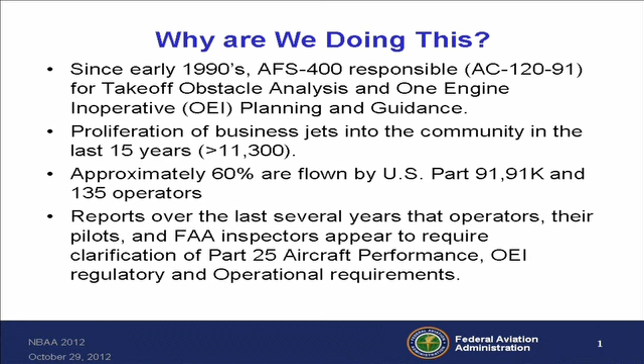And I know there's lots of stories, I've heard them all. So as far as the TAP goes, it cranked up about 2 years ago. We came up with a charter, and it was to improve the operator and inspector knowledge of CFR Part 25 aircraft performance.

Now, there's a difference between TERPs and aircraft performance, and I think everybody basically understands that. TERPs is something that the basic pilot just doesn't have to care about because he has an instrument approach plate or procedure, departure, star, or something like that, that is already done for him. All he has to do is be trained and understand how to fly that procedure, and he's A-OK. There's another side to the whole jet flying business, and that's the understanding of aircraft certification requirements.

Particularly when it comes to things like one engine inoperative takeoff planning. That's something that everybody has to be responsible for, and there has been very little work done, particularly by the FAA and the industry, in making sure that that knowledge has been put forth.

So we put together this group, members of FAA Flight Standards, Aircraft Certification Office, that's an FAA certification function. SAPOE is a Society of Aircraft Performance and Operations Engineers. NBAA, ALPA, and other industry subject matter experts to sit down and identify what we needed to do.

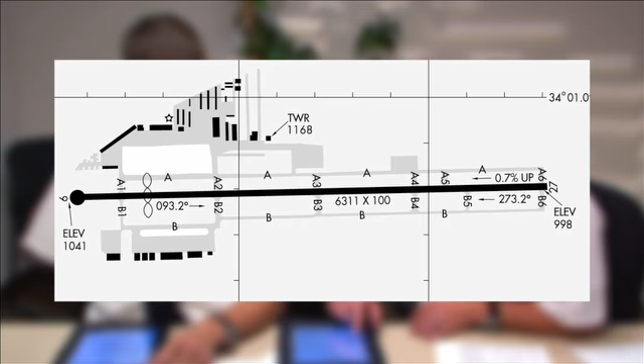Here we see a flight crew briefing the runway available for takeoff at the McCollum-Cobb County Airport near Atlanta. The runway at McCollum is 6,311 feet in length. However, the crew refers to the FAA Airport Facility Directory to see if declared distances have been published for this runway. Looking at the declared distances for runway 27, the crew notices that the takeoff run and the takeoff distance available are both 6,311 feet. However, the accelerate stop distance available is only 5,374 feet, a difference of over 937 feet. The pilot appropriately alerts his first officer to this fact to ensure no computation errors are made.

Awareness of declared distances is key to ensuring accurate arrival and departure calculations. Declared distances refer to the length of runway declared usable for takeoff and landing for the purpose of airplane performance calculations.

The accelerate stop distance available is the runway plus stopway length declared available and suitable for the acceleration and deceleration of an airplane aborting a takeoff. The accelerate stop distance available may be longer than the physical length of the runway when a stopway has been designated available by the airport operator, or it may be shorter than the physical length of the runway if the runway lacks an adequate runway safety area or in some other way does not meet runway design standards.

Takeoff run available is the runway length declared available and suitable for the ground run of an airplane taking off. Takeoff run available is typically the physical length of the runway, but it may be shorter than the runway length if necessary to satisfy runway design standards. For example, the takeoff run available may be shorter than the runway length if a portion of the runway must be used to satisfy runway protection zone requirements.

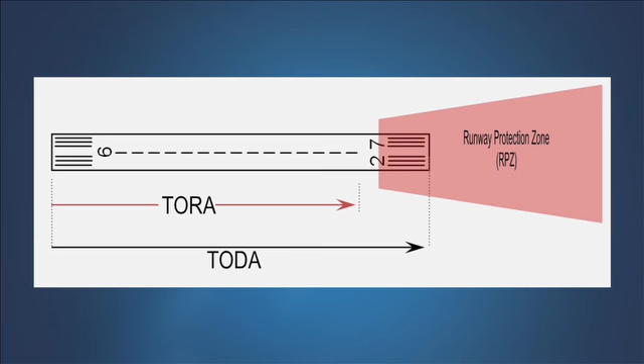Takeoff distance available is the takeoff run available plus the length of any remaining runway or clearway beyond the far end of the takeoff run available. The takeoff distance available is the distance declared available for satisfying takeoff distance requirements for airplanes where the certification and operating rules and available performance data allow for the consideration of a clearway in takeoff performance computations.

Landing distance available is the runway length declared available and suitable for a landing airplane. The landing distance available may be less than the physical length of the runway, or the length of the runway remaining beyond a displaced threshold, if necessary to satisfy runway design standards. In most cases, a runway's declared distances equal the physical length of the runway, or in the case of the landing distance available, the length of runway remaining beyond the displaced threshold. However, this is not always true with every runway.

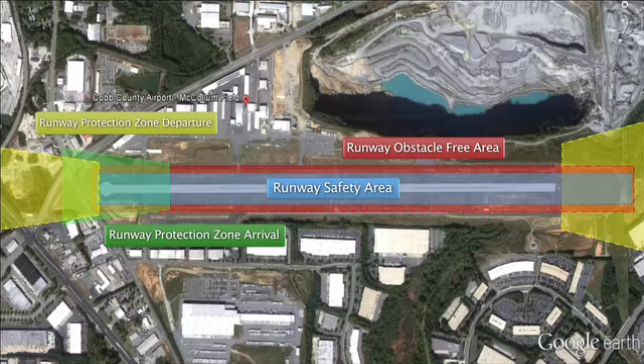Runway design standards ensure adequate protection from obstacles, other airplanes, vehicle traffic, and undesirable activities surrounding the runway and in the immediate vicinity of the takeoff and landing path. In most cases, the environment surrounding the runway permits the full use of the runway for performance planning purposes. However, there are some runways that are geographically constrained, and a portion of the runway's usable length must be used to meet these design standards.

For example, a runway safety area may extend into the usable portion of the runway, limiting the length of the runway that may be used for performance planning related to stopping the airplane, such as accelerate stop distance available and landing distance available. Let's look at how declared distances are used with takeoff and landing runway requirements for turbine-powered transport category airplanes.

The accelerate stop distance is the distance required to accelerate to a point in the takeoff, then in response to an event take the first action to reject the takeoff at a speed no greater than V1, and to bring the airplane safely to a stop.

Originally, the accelerate stop distance did not include consideration for events other than engine failure that could lead to a rejected takeoff. In 1978, the certification rules were amended to consider both engine failure and non-engine failure scenarios. Accelerate stop distance is now the longer of the distance with one engine failing just prior to V1, or with all engines operating throughout the rejected takeoff.

In response to the disproportionate number of rejected takeoff accidents on wet runways, the certification rules were again amended in 1998. Manufacturers are now required to provide wet runway accelerate stop distance and wet runway takeoff distance data in the airplane flight manual for all newly type certificated transport airplanes, and the operating limitations for these airplanes require the use of this data when the runway is wet.

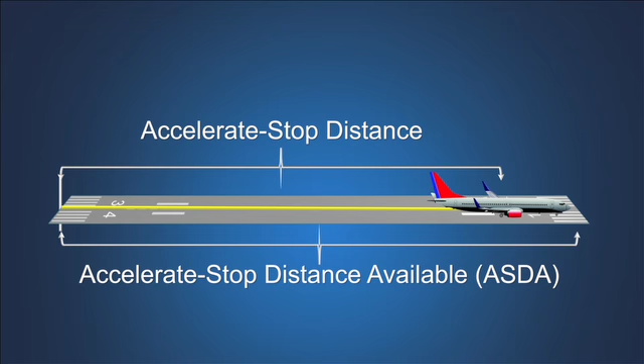The takeoff distance is the distance from the start of the takeoff roll to the point at which the airplane attains a specified height above the takeoff surface. For a takeoff on a dry runway, the takeoff distance is the longer of the one engine inoperative takeoff distance to 35 feet above the takeoff surface, or 115% of the all engines operating takeoff distance to 35 feet above the takeoff surface.

For airplane types certificated after 1998, when taking off from a wet runway, the takeoff distance will be the longer of the one engine inoperative takeoff distance to a height of 35 feet above the takeoff surface, if the runway is dry, or the one engine inoperative takeoff distance to a height of 15 feet above the takeoff surface, if the runway is wet.

On a wet runway, the all engines operating takeoff distance is 115% of the distance to a height of 35 feet above the takeoff surface. The longer of the one engine inoperative takeoff distances for either a dry or wet runway, or 115% of the all engines operating takeoff distance to 35 feet, establishes the minimum takeoff distance when a runway is wet. The calculated takeoff distance cannot be longer than the takeoff distance available.

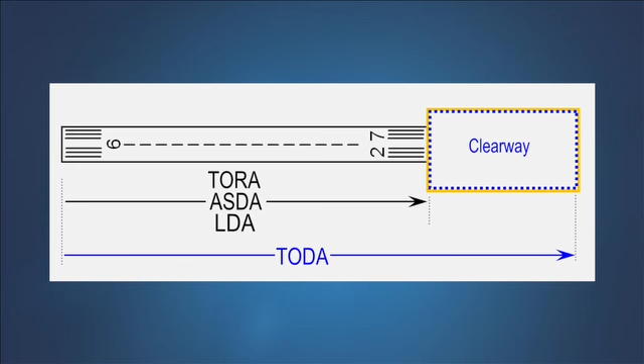The takeoff run distance is a consideration when the takeoff run available is less than the takeoff distance available. For example, when the runway has a designated clearway usable for takeoff planning, the takeoff distance available will be longer than the takeoff run available.

The takeoff run is the longer of the distance required from the start of the takeoff to the midpoint between liftoff and the point at which the airplane attains a height of 35 feet above the takeoff surface, with one engine inoperative, or 115% of the distance required from the start of the takeoff to the midpoint between liftoff and the point at which the airplane attains a height of 35 feet above the takeoff surface, with all engines operating, whichever is longer. The takeoff run applies only on a dry runway. The calculated takeoff run cannot be longer than the takeoff run available.

When taking off from a runway where the takeoff run available is equal to the takeoff distance available, the airplane's takeoff run may be considered to be equal to the airplane's takeoff distance. The landing distance demonstrated during certification is the distance required to come to a full stop from a point where the airplane is 50 feet above the runway.

Air carrier, on-demand, and fractional operators must plan their flight such that their landing weight at the destination airport and the alternate airport, if one is required, will permit the landing distance demonstrated during certification to remain within 60% of the landing distance available. These operating rules impose a limitation on takeoff weight in consideration of the fuel used in flight.

For eligible on-demand and fractional operators that meet certain qualifications, including the use of an approved destination airport analysis, this requirement is adjusted such that the landing distance demonstrated during certification must remain within 80% of the landing distance available.

FAA guidance recommends that as close as practical to the time of arrival, flight crews perform an assessment of the actual landing distance required based on the reported weather and runway conditions and include an additional 15% safety margin. The minimum runway required resulting from this assessment must be less than the landing distance available.

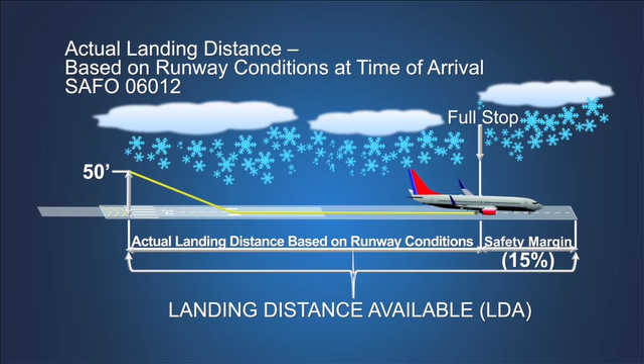The airplane operating rules and operating limitations establish minimum distance requirements as well as weight limitations for takeoff and landing, based on performance data supplied in the airplane flight manual. The minimum distances required for takeoff and landing, obtained either in planning prior to takeoff or in performance assessments conducted at the time of landing, must fall within the applicable declared distances before the pilot can accept that runway for takeoff or landing.

Declared distances are published in the FAA Airport Facility Directory for runways where they have been established. In the not-too-distant future, all Part 139 certificated airports, which are those with scheduled air carrier operations, will have declared distances published. In some instances, an airport may shorten declared distances for a runway when necessary to meet runway design standards. This is the case with Cobb County McCollum Airport near Atlanta, Georgia.

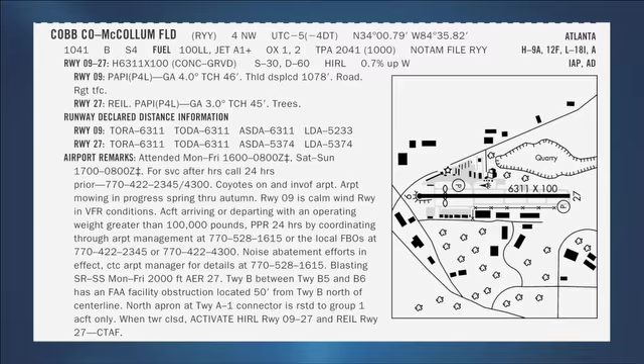However, there are many runways that do not have declared distances published. For runways without published declared distances, these distances may be assumed to be equal to the physical length of the runway. If the runway has a displaced threshold, then the landing distance available is assumed to be the runway length less the amount of the threshold displacement.

Pilots who use U.S. government instrument approach charts and airport diagrams may recognize the inverse D graphic symbol. This symbol is also used to inform operators that there are declared distances established for one or more runways for this airport. The pilot should consult the FAA Airport Facility Directory to obtain these distances.

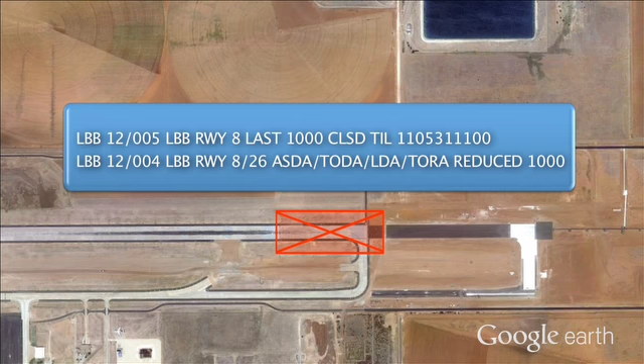Temporary partial runway closures, such as this example from Lubbock, Texas, may include a notice to airmen reporting revised distances. Pilots must be aware that the runway lengths stored in the navigation database of the GPS or flight management system may not reflect the runway's declared distance.

The runway length at McCollum-Cobb County is 6,311 feet, which is the same value stored in the navigation database.

Flight management systems for many business aircraft incorporate performance calculation functions. These functions can compute the takeoff and landing distances required for conditions and have the capability of calculating the maximum allowable takeoff or landing weight for a particular runway. However, these calculations are based on the runway information stored in the database. The runway length stored in the navigation database may not reflect a runway's declared distances, or the length of a runway remaining beyond a displaced threshold available for landing.

For those flight management systems that do provide takeoff and landing performance calculations, the results of these calculations may not reflect the true maximum allowable takeoff and landing weight for that runway based on conditions.

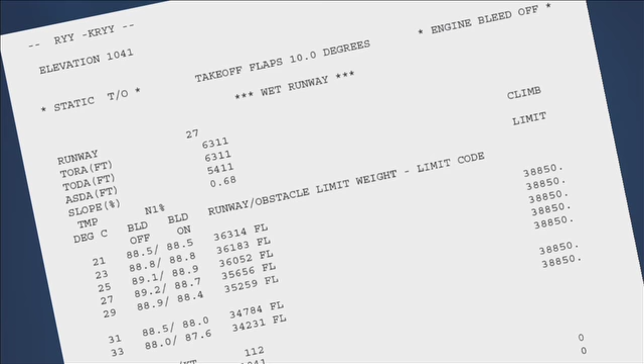For example, the flight management system for this airplane calculates a maximum allowable takeoff weight of 38,247 pounds for takeoff on runway 27 if the runway is wet. However, the runway analysis for runway 27 reports a maximum allowable takeoff weight of 35,656 pounds, a difference of over 2,500 pounds.

If the crew relies on the flight management system to compute their required takeoff field length, which in this example is 6,273 feet, they may not be warned that this value has exceeded one of the runway's declared distances. The 6,273-foot takeoff field length required exceeds the runway's accelerate stop distance available of 5,374 feet. The flight management system will provide no warning message of this exceedance.

As you can see from this view, Cobb County McCollum Airport's runway 27 has a physical length of 6,311 feet. However, both the declared accelerate stop distance and the landing distance available are 5,374 feet, which is 937 feet shorter than the physical runway length. There is no displaced threshold on runway 27, so some pilots may wonder why these distances are reduced. The last 937 feet of runway 27 is used to satisfy the requirement for a 1,000-foot runway safety area.

The application of declared distances is intended to ensure that, with respect to airplane performance capabilities only, the airplane has the capability of stopping during the landing maneuver or in the event of a rejected takeoff before intruding into the runway safety area. For this reason, the declared accelerate stop distance available and the landing distance available is less than the physical length of the runway.

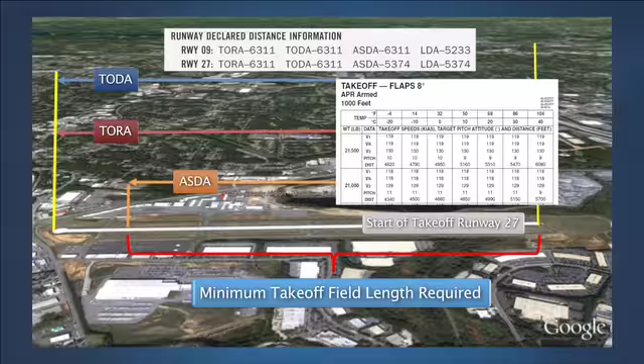The takeoff data furnished for most business jets provides a minimum takeoff field length required based on takeoff weight, takeoff configuration, and environmental conditions. When the manufacturer provides takeoff performance data that shows only one minimum runway length, this length must not exceed the most restrictive of the takeoff declared distances of accelerate stop distance available, takeoff run available, or takeoff distance available.

The minimum field length required for takeoff is usually based on the balanced field concept, which is a condition where the selected takeoff V1 speed results in accelerate stop distance being equal to the one engine inoperative takeoff distance.

A small number of business jets are furnished with unbalanced field takeoff data that allows for the independent calculation of takeoff distance, takeoff run, and accelerate stop distance. These airplanes can realize a takeoff weight advantage over an airplane that is limited to balanced field takeoff data by calculating an unbalanced V1 that may be higher or lower than the balanced value, depending on the declared distances available.

If the runway remaining beyond the end of the accelerate stop distance available is included in the takeoff run available and the takeoff distance available, then by using the unbalanced V1, this remaining runway may be used for calculating the takeoff run and takeoff distances to permit an increase in maximum allowable takeoff weight. However, the use of unbalanced takeoff data is an involved process. Use of an airplane performance planning software tool or an airport engineering service that furnishes a runway analysis is recommended.

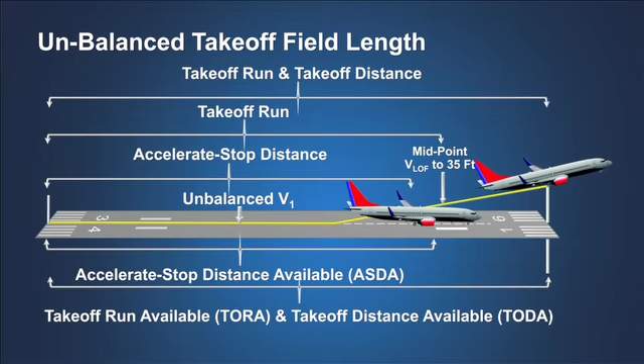A number of business airplane operators use airport diagrams and instrument approach procedure charts furnished by a commercial provider, for example Jeppesen. On their charts, Jeppesen publishes usable runway lengths, not declared distances. The usable length concept was created many years prior to the formal creation of the declared distance concept and continues to be published on their charts in lieu of declared distances.

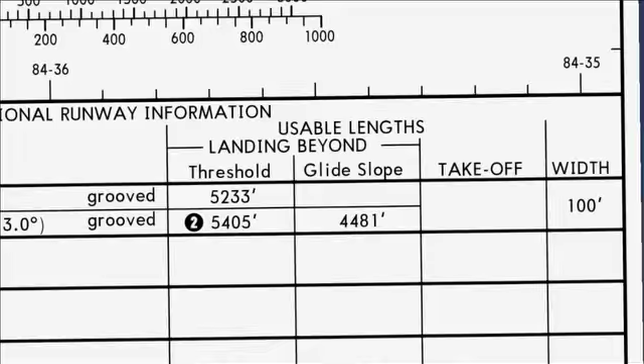Usable length takeoff is almost identical to takeoff run available, and usable length landing beyond threshold is similar to landing distance available, but they are not takeoff run available and landing distance available, and Jeppesen does not incorporate anything similar to accelerate stop distance available and takeoff distance available on these charts.

When a takeoff value and/or landing value is available from source information that is shorter than the runway, Jeppesen wants to display the more conservative values. Jeppesen also publishes notes or otherwise explains length deficiencies or unique usable lengths.

When the landing length is shorter than the full runway length, and this is not due to a displacement, an additional explanatory ball note is applied, reading similar to: last 900 feet is unavailable for landing distance computations. A displacement is accounted for on the charts, not in a length value, but rather in a displaced threshold symbol designation on the charted runway.

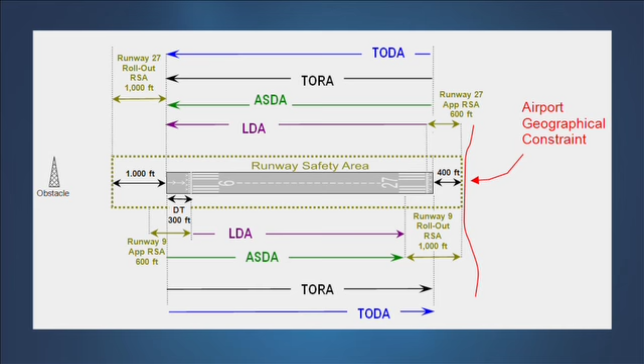Jeppesen's charts are meant to be used for flight and navigation in the first place and flight planning in the second place. Jeppesen additionally offers other products and services specifically for flight planning. The full runway length will always be applied on the plan view to serve pilots' overall needs, as well as unplanned emergency decision-making. It is important to understand that the application of declared distances has no bearing on the operational use of the runway for taxi, takeoff, and landing rollout operations, provided the runway surface is appropriately marked as usable runway.

Now you're going to see some more terms that are going to come up, TORA, RSA, and everything. The bottom line is, in this declared distance business, there are 4 things you need to know: takeoff run available, TORA; TODA, takeoff distance available, which includes the length of the clearway provided; accelerate stop distance available, ASDA; and landing distance available. Those are the 4 key things to declared distances. But what does it all really mean?

By 2015, all the Part 139 airports have to have these declared distances defined. So what it means is, if you think you have a 6,311-foot runway and they cannot provide a 1,000-foot safety area off the end of that runway, they're going to eat the runway to get that 1,000 foot. It may be this much, maybe 600 feet. So you actually lose, for your accelerate stop distance available, that effective runway length that you thought you had. It's going to be in your nav computer or your flight data computer as 6311, when actually it may be 5,300. I think that's an important point to get across.

But the main thing is, as far as declared distances go, they are applying to resolving this runway safety area. It's 500 feet from here to here, and 1,000 feet on either end. And if you can't provide that safety area, you have to eat the runway up accordingly with these terms.

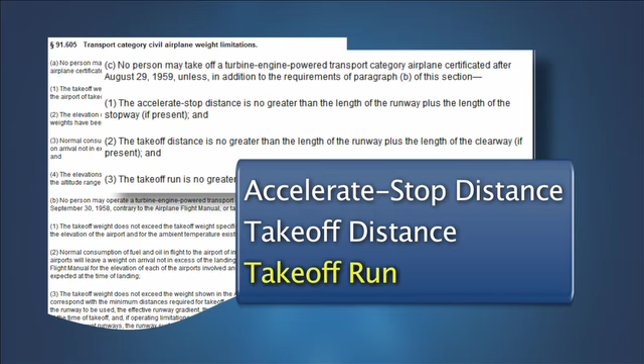A requirement of transport airplane performance planning is determining that the takeoff can be safely conducted on the length of runway declared usable for takeoff. The certification rules prescribe 3 distances that must be considered: accelerate stop distance, takeoff distance, and takeoff run. Of particular importance is accelerate stop distance - the distance required to accelerate to a point in the takeoff, then in response to an event, take the first action to reject the takeoff at a speed no greater than V1 and bring the airplane safely to a stop.

Originally, the accelerate stop distance did not include consideration for events other than engine failure that could lead to a rejected takeoff. In 1978, the certification rules were amended to consider both engine failure and non-engine failure scenarios. Accelerate stop distance was revised to be the longer of the distance with one engine failing just prior to V1 or with all engines operating throughout the rejected takeoff. However, accelerate stop distance was still determined only for a dry runway. In response to the disproportionate number of rejected takeoff accidents on wet runways, the certification rules were again amended in 1998.

Manufacturers are now required to provide wet runway accelerate stop distance and wet runway takeoff distance data in the airplane flight manual for all newly type certificated transport airplanes, and the operating limitations and rules require the use of this data when the runway is wet.

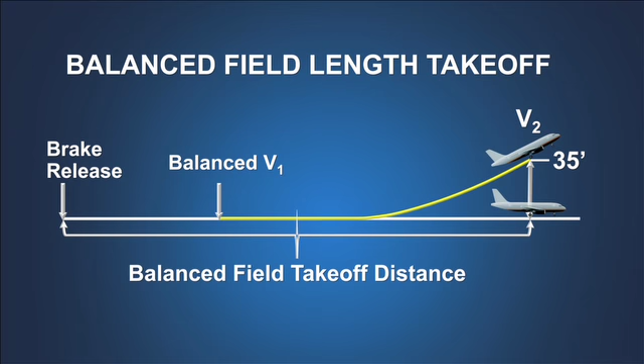Typically, the minimum field length required for takeoff in a 2-engine turbojet transport category airplane is based on the balanced field length concept, where the accelerate stop distance is equal to the 1-engine inoperative takeoff distance. The balanced field length can be obtained when, for a given takeoff weight, a V1 speed is selected such that these 2 distances are equal.

When the runway is wet, the accelerate stop distance increases due to reduced friction during braking. The braking friction on a wet runway varies greatly with speed, while it is essentially constant with speed on a dry runway. At faster speeds, the wet runway braking friction is much lower than at slower speeds. The reduction in braking friction is partially offset by the stopping performance credit permitted for the use of thrust reversers on a wet runway if they are installed and operative.

On a dry runway, the 1-engine inoperative takeoff distance ends when the airplane reaches a height of 35 feet above the runway. To rebalance the probability of rejecting a takeoff on a wet runway versus continuing it, and to reduce the speed at which braking would be attempted, the regulations allow us to consider that the wet 1-engine inoperative takeoff distance is complete when the airplane reaches 15 feet rather than 35 feet required for a dry runway.

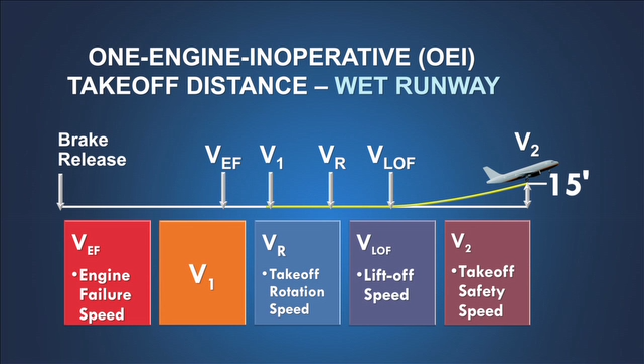Reducing this screen height also reduces the one-engine-inoperative takeoff distance on a wet runway. The allowance for reverse thrust credit and the use of a 15-foot screen height help engineers rebalance the takeoff field length required for takeoff on a wet runway through the use of a lower wet runway V1 speed.

The ability to reduce V1 speed can be limited by VMCG speed and the lowest permissible V1 speed in relation to this ground minimum control speed. When V1 speed is limited by VMCG speed, the takeoff on a wet runway will be accelerate-stop limited.

Note that the all-engines-operating takeoff distance for a wet runway remains unchanged from that for a dry runway. The all-engines-operating takeoff distance screen height for a wet runway remains at 35 feet and still must include the 15% margin.

In most cases, the maximum allowable takeoff weight on a wet runway will remain less than the allowable weight on a dry runway, even though the wet runway case includes credit for available reverse thrust and reduced screen height.

However, there are exceptions. Rocky Mountain Metropolitan Airport, better known as Jeffco, presents an interesting wet runway example for some turbojet airplane types. Runway 11 left, 29 right is the primary runway used by jet airplanes.

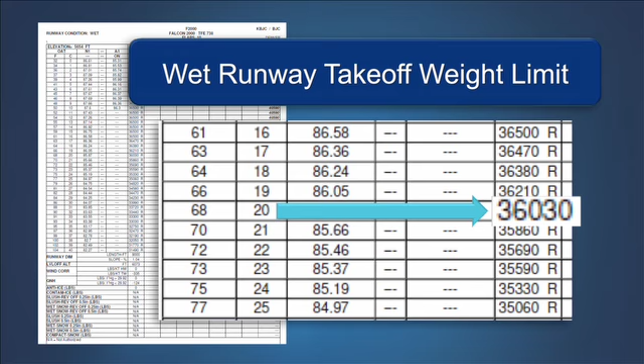Runway 29 right is 9,000 feet in length, with an upslope of 1.2%. A check of a takeoff analysis for one particular business jet type finds that the takeoff weight limit on a wet runway at 20 degrees Celsius appears to be 36,030 pounds. On a dry runway for this same airplane type, the maximum takeoff weight is 33,840 pounds, or almost 2,200 pounds lighter than the apparent weight limit previously calculated on a wet runway.

At 33,840 pounds, the balanced field takeoff distance is precisely 9,000 feet, the length of runway 29 right. However, at this same weight, the balanced field takeoff distance on a wet runway is only 8,000 feet.

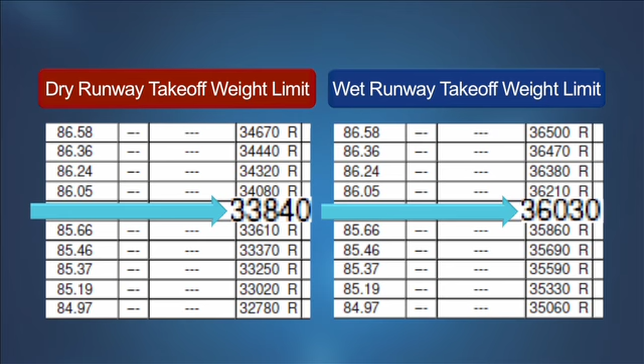The reduced screen height and credit for use of thrust reversers determining the wet runway takeoff performance can in some cases actually produce a situation where, at a given takeoff weight, the wet takeoff performance appears better than the dry runway performance. This can lead to a situation where the wet runway analysis produces greater takeoff weights than the dry analysis, but the certification rules have an additional requirement to address this situation.

These rules specify that the accelerate-stop distance and the one-engine-inoperative takeoff distance must be the greater of either the dry runway or wet runway distances.

This requirement is reflected in the instructions furnished in most FAA-approved airplane flight manuals, where wet runway takeoff performance data is furnished. Users are advised to check the distances required or takeoff weight limits determined on a wet runway against those for a dry runway condition and to use the most restrictive distance or weight limit.

In some instances, the airport analysis furnished will incorporate this dry check. However, users should verify this feature with their performance engineering services provider for their aircraft.

While the scope of this discussion is focused on takeoff performance planning, pilots of transport category airplanes should also be familiar with the takeoff safety training aid. The goal of this aid is to reduce the frequency of rejected takeoff accidents through improved pilot knowledge and awareness of the factors affecting the successful outcome of the go, no-go decision.

The takeoff safety training aid may be viewed at the FAA's Airline Operator Training website.

In summary, when performing departure planning from a wet runway, pilots should have a general idea what the effects of this wet surface will have on accelerate-stop distance and takeoff distance.

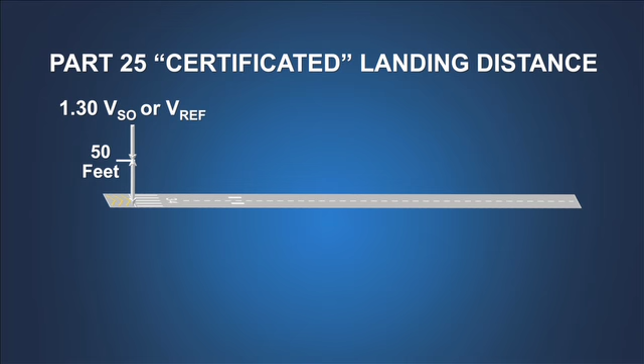The landing distance for a transport category airplane is defined by the certification rules in Part 25. This certificated landing distance starts at the point where the airplane main wheels are 50 feet above the runway surface. It continues through a nominal air distance and includes time delays, allowing for the transition into the stopping configuration. The landing distance ends at the point where the airplane comes to a complete stop.

The use of deceleration devices, such as normal wheel brakes with anti-skid action, spoilers, and lift dumping systems, may be used in determining the landing distance. However, the use of thrust reversers is not considered when calculating the certificated landing distance. Landing distances based on these certification rules reflect the maximum capability of the airplane and are generally shorter than the landing distances achieved in normal operations.

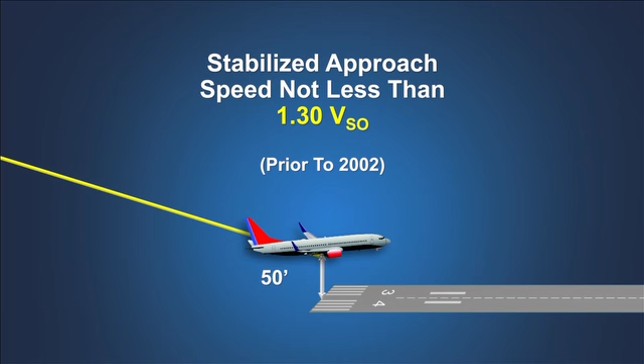Prior to 2002, the certificated landing distance was based on a stabilized approach at an approach speed not less than 30% above the stalling speed in the landing configuration, or 1.3 VSO. A speed greater than 1.3 VSO could be used if needed for acceptable airplane handling characteristics. Over the years, this final approach speed became known by the term VREF, or Landing Reference Speed. However, this particular V speed was never part of the certification rules.

Beginning in 2002, the term VREF was officially incorporated into the Code of Federal Regulations as a defined V speed. Since this change occurred at the same time the rules governing stall speed calculation were amended, VREF differs slightly from its previous use. VREF as now defined may not be less than the reference stall speed, or VSR, which is the speed at which the stall speed in 1G flight corresponds to the point of maximum lift coefficient just before the lift starts decreasing as angle of attack is further increased. VREF must also be above the landing minimum control speed and any speed necessary to demonstrate acceptable airplane handling characteristics.

With the adding of VREF to the regulations, the rule defining approach categories was also amended. For airplanes where VREF is defined by the certification rules, the approach category for that airplane is based on its VREF speed determined at its maximum certificated landing weight.

Stop here just for a second because I want to emphasize something. FAA just recently released a Safety Alert for Operators on this whole topic. And the issue is this: if your airplane is a Category C airplane, you have to fly the Category C approach minimums. You can't fly between 91 and 121 knots because you're lighter, fly slower, and fly Category B minimums. Because the rule requires that you fly at 1.3 VSO at a maximum certificated landing weight, or VREF at maximum certificated landing weight.

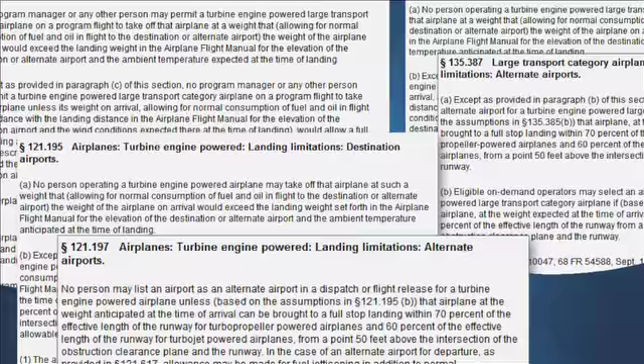It's pretty critical: the landing distances determined during certification are established with full awareness that operating rules require additional factors to be added when determining the minimum operational field lengths for landing during normal line operations. The operating rules for Part 121, Part 135, and Part 91K require that the landing distance demonstrated during certification remain within a specified percentage of the runway length available for landing at both the destination and alternate airport. As a result, these rules establish a minimum operational field length for landing. This requirement does not apply to Part 91 operators, but voluntary adherence to these rules is encouraged.

These operating rules impose a limitation on takeoff weight, such that you do not plan to arrive at your destination or alternate airport at a weight that will not allow you to meet the landing distance requirement specified in the operating rules. Therefore, any planning intended to demonstrate compliance with these rules must occur prior to takeoff, or as a condition of dispatch for those operators subject to dispatch requirements.

When required by the operating rules, the landing distance demonstrated during certification must permit the airplane to come to a full stop within 60% of the landing distance available. Another way of saying this is that the landing distance demonstrated for certification must be multiplied by a factor of 1.667, or divided by 60%, to define the factored landing distance on a dry runway. The resulting factored landing distance is intended to account for operational variables, including piloting techniques, flight path deviations, tire and brake wear, atmospheric conditions including gusts, and other variables not addressed during landing distance certification.

For eligible Part 135 and Part 91K operators, the landing distance demonstrated during certification must permit the airplane to come to a full stop within 80% of the landing distance available. In this case, the demonstrated landing distance for certification is multiplied by 1.25, or divided by 80%, to obtain the factored landing distance on a dry runway for these operators.

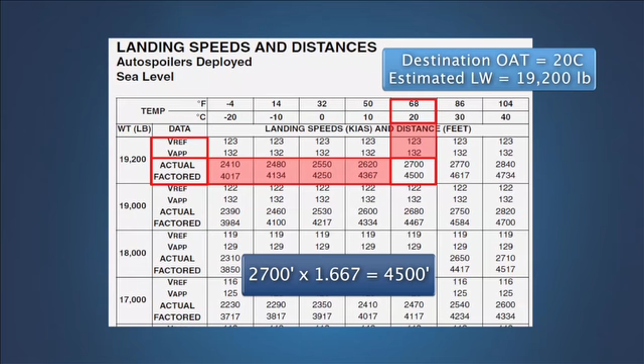Landing distance data published in the Airplane Flight Manual varies widely between manufacturers. Some furnish the landing distances determined during certification, in which case pilots are expected to apply the appropriate multiplier, 1.667 or 1.25, while others furnish the factored landing distance data for use in complying with the operating rules. Some manufacturers provide both the certified and factored landing distances, as in this example. A few manufacturers do not provide landing distance data at all, but rather provide data on the maximum allowable landing weight as a function of landing distance available.

Let's use the data we just looked up to perform our pre-departure landing distance evaluation. At 19,200 pounds, the landing distance determined during certification is 2,700 feet, and the factored landing distance is 4,500 feet. Since the landing distance available is 5,000 feet, the runway length is adequate provided the runway is dry.

However, if the runway is expected to be wet or slippery at the time of arrival, the operating rules require that the dry runway factored landing distance be increased by an additional 15%. In this example, our factored landing distance increases to 5,175 feet.

Therefore, a 5,000-foot runway that is wet is no longer of adequate length for a planned landing weight of 19,200 pounds. It is important to note that this additional 15% increase is not based on demonstrated wet runway stopping performance. The wet runway factored landing distance may not provide the additional distance necessary to accommodate actual stopping performance on a wet runway, let alone a runway contaminated by snow or ice.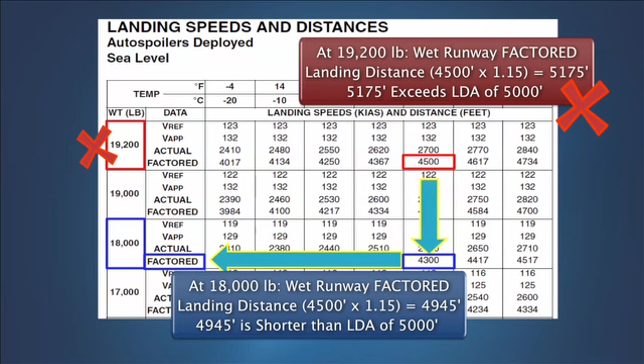The factored wet landing distance exceeded the landing distance available, so we cannot legally take off. We will need to reduce the planned landing weight. If we multiply 4,300 feet by the wet runway factor of 1.15, the resulting distance is shorter than the landing distance available. Therefore, our takeoff weight must be reduced to a value that permits a landing weight not in excess of 18,000 pounds.

Many runways used by transport category airplanes have skid-resistant surfaces, which may include runway grooving, porous friction course overlays, or a combination of both. Runway grooving and PFC surfaces allow water to escape from beneath the aircraft tires traveling at high speed, which reduces the threat of hydroplaning, but does not eliminate it.

These surfaces do not drain water from the runway, nor do they increase the friction capacity of the runway surface. A common misconception is that a grooved or PFC runway is considered to be dry for the purposes of applying the 15% increase when the weather reports or forecasts indicate that the runway may be wet or slippery at the time of arrival. Unless otherwise approved by the FAA, if the weather reports or forecasts indicate that the runway will not be dry at the time of landing, then the 15% increase to the factored landing distance must be applied.

The intent of this pre-departure planning is to ensure that a flight operation does not begin that cannot reasonably be concluded upon reaching the destination or alternate airport. Pre-departure planning is required by Part 121, Part 135, and Part 91K operators. Part 91 operators are encouraged to do so, but it is not required by the operating rules.

At the destination airport, the factored landing distance must be evaluated using the most favorable runway, usually the longest runway, in still air conditions, and for the most suitable runway for landing in consideration of wind conditions, instrument approaches available, or other factors that make use of this runway desirable. The evaluation of the most suitable runway is not required when an alternate airport with a runway that meets both of these requirements is designated.

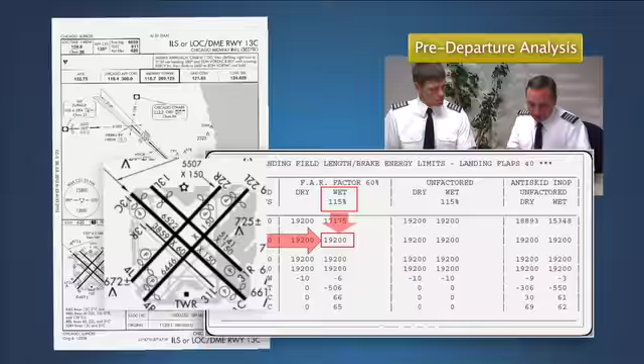The operator must evaluate the longest runway in still air conditions. They must also evaluate the most suitable runway given the weather conditions and approaches to be used, unless an alternate airport is designated. Using Chicago Midway as our destination airport, for our estimated time of arrival, Runway 13 Center is both the longest and the most suitable runway, given the forecast weather and the ILS approach to this runway.

The results of this analysis may be presented to the flight crew in the form of a maximum allowable landing weight on a particular runway. For Runway 13 Center, our maximum allowable landing weight is 19,200 pounds.

Another option available is to use the data and procedures provided in the airplane flight manual to determine the dry or wet runway factored landing distance required at the airplane's estimated landing weight. The dry or wet runway factored landing distance, as applicable, must not exceed the runway's landing distance available. This pre-departure planning does not ensure that the airplane can safely land on the runway in use at the time of arrival.

Chicago Midway Information Romeo, 2251 Zulu. Wind 150 at 7. Visibility 3 miles. Rain. Ceiling 600 broken, 1,500 overcast. Temperature 2, dew point 0. Altimeter 2989. Approach in use ILS Runway 31 Center. Landing and departing Runway 31 Center.

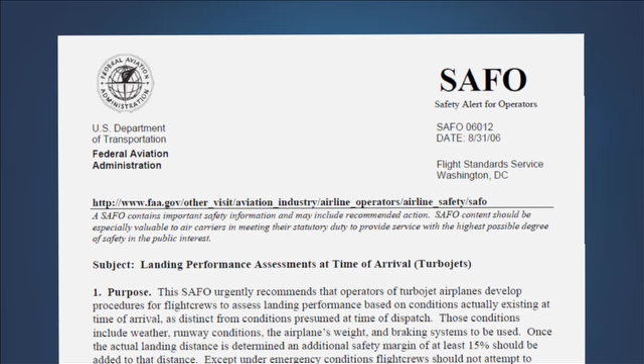FAA SAFO 06012 recommends that all turbojet operators have procedures to ensure that a full stop landing with at least a 15% safety margin beyond the actual landing distance can be made on the runway to be used, in the conditions existing at the time of arrival and with the deceleration means and airplane configuration that will be used.

While this assessment does not mean that a specific calculation must be made before every landing, when conditions deteriorate or the landing runway changes from the planned runway used in pre-flight planning, a calculation or other method of determining the actual landing distance capability should be accomplished.

This assessment can take many forms. One example would be determining before the flight that you can land with at least a 15% safety margin on the planned arrival runway at maximum landing weight in the planned landing configuration with 10 knots of tailwind, in any runway braking condition better than poor.

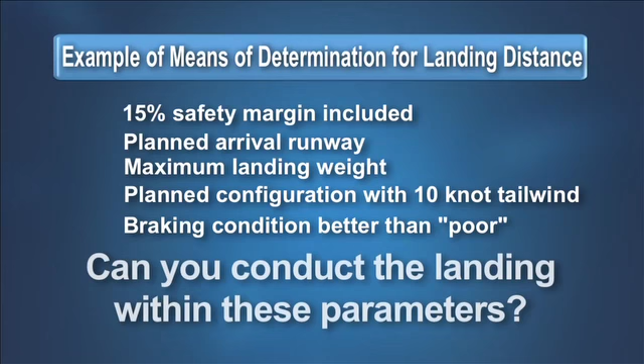Your assessment at the time of landing may be as simple as verifying that the landing would be conducted within those parameters. This landing distance assessment should be accomplished as close to the time of arrival as practical, taking into account workload considerations during critical phases of flight and using the most up-to-date information available at the time.

Pilots should also look beyond the current conditions and plan for the worst-case conditions. Additionally, operators should use the most adverse reliable braking action report if available, or the most adverse expected conditions for the runway, or portion of the runway that will be used for landing, when determining the landing performance assessment.

When conditions are such that the runway surface conditions vary along the runway, such as braking action fair for the first two-thirds but poor for the last third, then the most conservative or worst condition for the portion of runway to be used should be used for the landing distance assessment.

Based on the ATIS information received, what would you consider when performing a landing distance assessment? At a minimum, we should consider the operational impacts of the wet runway and the tailwind.

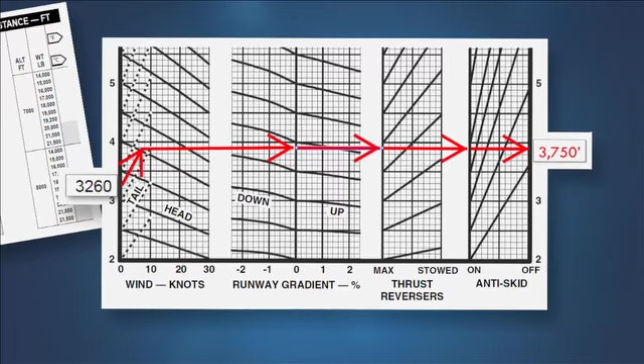The assessment may be based on manufacturer-furnished advisory landing distance data for use on wet and contaminated runways. This data is an analytical computation that adjusts landing distances determined during certification for the detrimental effects on braking performance resulting from a particular type of contamination. While the data is not based on actual flight testing, it does allow flight crews to assess actual landing performance based on the anticipated landing conditions.

Once the actual landing distance is known, SAFO 06012 recommends that a 15% safety margin be added and that the resulting distance be less than the declared landing distance available, unless imminent risk to continued flight makes this landing imperative. For those airplanes where advisory contaminated runway landing distance data is not available, SAFO 06012 provides factors based on the reported runway condition or braking action reports to determine the minimum runway required for landing.

These factors are applied to the factored dry runway landing distance used in pre-departure planning and include the recommended 15% safety margin. After this initial landing distance assessment is complete, pilots should monitor for deteriorating runway conditions prior to landing and base their decision to continue on the most conservative assessment of the aircraft's stopping performance on the runway.

In some cases, contradictory information concerning runway conditions or braking action reports may force flight crews to apply their best judgment about which information is likely to be most accurate. The receipt of new or updated information on runway conditions may result in the reevaluation of a previous decision to land.

In a case where uncertainty of landing distance remains, it may be appropriate for the pilot monitoring to quickly reference the QRH or tab data, or in other cases, the prudent use of a go-around and a holding pattern at a safe altitude to reevaluate the decision to land or divert may be the best decision.

Citation 938 Sierra Charlie, cleared to land, runway 31 center. Wind 140 at 8. Reported braking action fair touchdown, poor rollout. Based on the previous time of arrival landing assessment, but now with a report of deteriorating runway conditions, what would you do?

Operators of turbojet airplanes are encouraged to develop standard operating procedures for flight crews to assess landing performance based on the runway conditions actually existing at time of arrival. Ultimately, it is up to the crew, based upon the amount of time, type of tools, and information available to them, to decide the most appropriate time to accomplish this assessment, and how detailed it must be based on the situation facing them.

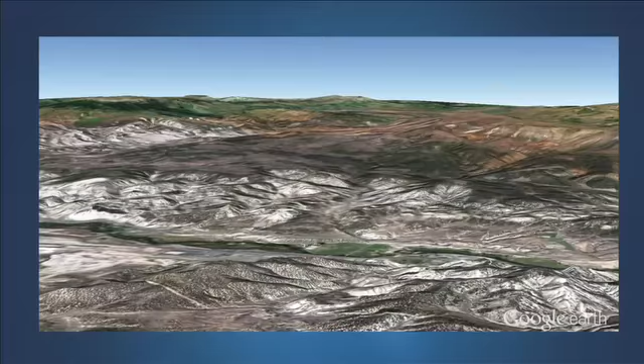Planning for takeoff obstacle clearance in transport category airplanes. Obstacle clearance is an important element in transport category airplane performance planning. This module will review the relevant certification rules, the operating rules, and FAA guidance for assessing takeoff obstacle clearance in transport category airplanes. Takeoff obstacle clearance planning often presents its greatest challenge at mountain airports.

The airport at Aspen, Colorado, located in the Rocky Mountains, serves as an excellent example with which to explore this challenge. Let's listen in as a flight crew briefs their flight plan from Aspen to Atlanta, taking into consideration one engine inoperative. I would think the first thing we need to look at is the runway out of Aspen.

So I have that right here. And taking a look at the runway, it looks like it's 8,006 feet long, but there is a displaced threshold. So let's go see what that's all about and make sure there's no limits there. When you look at the numbers, it says the last 1,000 feet is not available for landing distance computations in the note. Well, we're not landing there, we're taking off, so that's not going to be a huge issue for us. No big deal there.

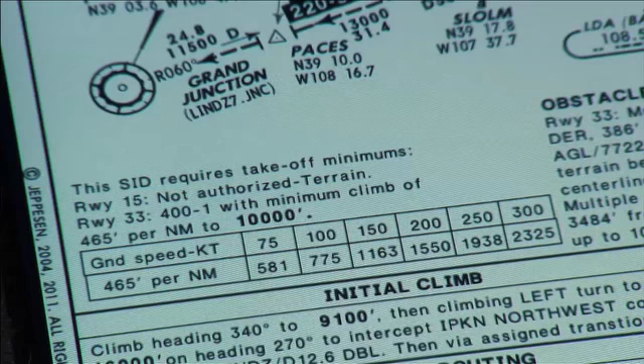We're also going to be using the LINDZ departure procedure, and it has weather minimums on it, which are, I believe, a 400-foot ceiling and 1 mile visibility. Is that correct? That's correct. Okay, and a minimum climb gradient. Do you have any questions about that?

I don't think we're going to be able to meet that climb gradient single engine. No, we won't. Two-engine, not much of a problem. We can look that up and verify it. But two-engine, we can meet it. Single engine, we won't. So we're going to need another plan.

This flight crew has accomplished a thorough review of the performance challenges affecting their planned departure from Aspen. Now let's take a moment to examine the challenge of takeoff obstacle clearance and avoidance planning when departing Aspen. A review of the certification rules regarding the takeoff path is a good place to begin our discussion.

The certification rules define a takeoff path or vertical profile that is used to establish both the takeoff climb limit weight and the takeoff flight path for determining the takeoff obstacle limit weight. The takeoff path is divided into a series of segments. Let's examine each of these segments in greater detail.

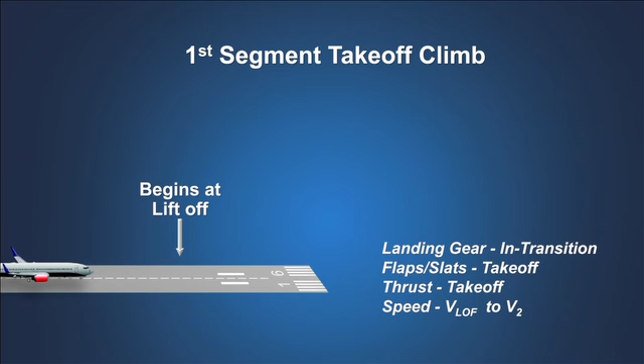The takeoff path begins from a standing start. The critical engine is failed at VEF and remains inoperative for the rest of the takeoff. The first segment begins at liftoff and continues until the landing gear is fully retracted. The airplane is accelerated in the air to V2 speed. During this segment, a turbine-powered airplane with 2 engines must be capable of achieving a positive climb gradient in still air with 1 engine inoperative and without the benefit of ground effect. Additional climb performance is required for airplanes with more than 2 engines.

The second segment begins once the landing gear is fully retracted. The airplane must once again demonstrate a minimum climb gradient in still air with 1 engine inoperative. For a turbine-powered airplane with 2 engines, that minimum climb gradient is 2.4%, which is determined at the point where the landing gear is fully retracted. Additional climb performance is required for airplanes with more than 2 engines.

The first and second segment climb is based on flying V2 speed. However, it is important to understand the significance of this speed. If the engine fails at the most critical point in the takeoff at VEF, which is reached just before V1 speed, and the pilot, electing to continue the takeoff at V1, rotates into the target engine failure takeoff pitch attitude, the airplane will attain V2 speed at the point that the airplane attains a height of 35 feet above the runway.

If the engine failure occurs above V1, many AFM procedures recommend rotating to the same target pitch attitude. As a result, the speed obtained at 35 feet will be higher than V2. These procedures recommend maintaining this higher speed up to a maximum of V2 plus 10 to V2 plus 20 knots, when such an increase does not affect climb performance.

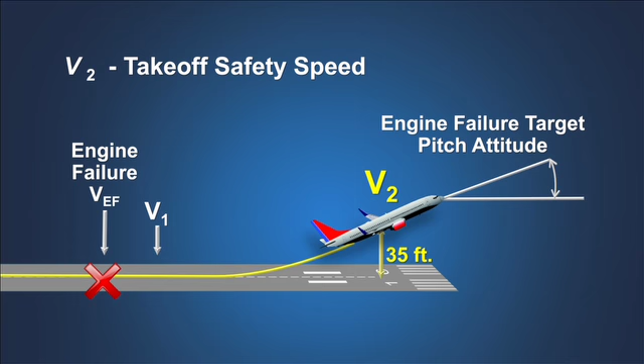The second segment must continue to a minimum height of 400 feet above the runway surface. No changes are allowed to the airplane's configuration or thrust while maintaining a speed not less than V2. The climb gradient during the second segment will gradually diminish due to thrust decrease resulting from increasing true airspeed and reduced air density as the airplane gains height. Therefore, the climb gradient capability will be greatest at the beginning of the second segment.

Once the airplane has achieved at least 400 feet above the runway surface, the transition segment may begin. During this level flight segment, the airplane is accelerated to flap and slat retraction speed and then to the final takeoff airspeed. The transition segment ends when the airplane is in the clean en route configuration at an airspeed of not less than VFTO and when the remaining engines are set to maximum continuous thrust.

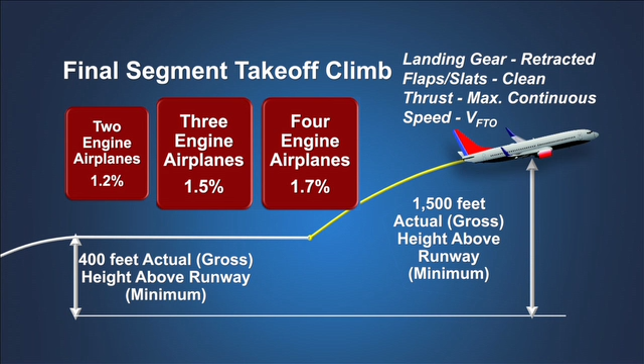If the airplane is less than 1,500 feet above the runway surface at the end of the transition segment, then the final takeoff segment begins at that point and extends until the airplane reaches at least 1,500 feet. At any point above 400 feet, a turbine-powered airplane with 2 engines must be capable of achieving a minimum climb gradient of 1.2% in still air. Additional climb gradient capability is required for airplanes with 3 or 4 engines.

Over the years, the airspeed flown during the final segment has been referred to by a number of different terms. You may be familiar with VFS, VENR, or VSSE. In 2002, FAA incorporated the term VFTO, or final takeoff speed, into the certification rules to identify the airspeed to be flown in the final segment. This speed provides an adequate margin above the stall speed in the clean configuration. Here we see the complete takeoff path from brake release until the minimum height of 1,500 feet above the runway surface.

It is helpful to think of these minimum climb gradients imposed by the certification rules as a mandatory minimum level of the airplane's surplus energy condition during takeoff. This surplus energy can be used for either climb or acceleration, or some combination of the two. Since these climb gradient requirements are based on airport temperature and pressure altitude, they are not runway specific.

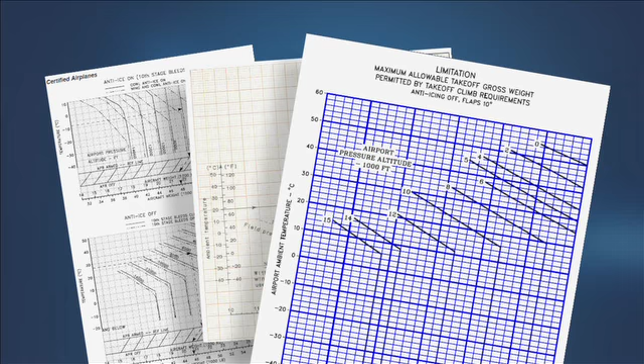However, choosing flap settings for a given takeoff can affect the climb limit weight. Increasing flap settings used for a takeoff reduces the runway length required for takeoff in most cases. However, it also decreases the takeoff weight limit at which these minimum gradients can be achieved. Depending on the runway choice available for takeoff, this interrelationship effectively means that the climb limit weight may be runway specific.

These climb gradient requirements are intended to provide a minimum acceptable level of one engine inoperative climb performance, but are definitely not intended to satisfy obstacle clearance requirements. Obstacle clearance must be considered separately. The requirements for takeoff obstacle clearance may be found in Subpart I of Part 121 and Subpart I of Part 135 of the Code of Federal Regulations.

Looking back at the operating rules for an airplane like the DC-6 or Lockheed Constellation, following an engine failure on takeoff at V1 speed, the airplane was required to clear obstacles by 50 feet at any point until the airplane's actual height above the runway was 1,000 feet.

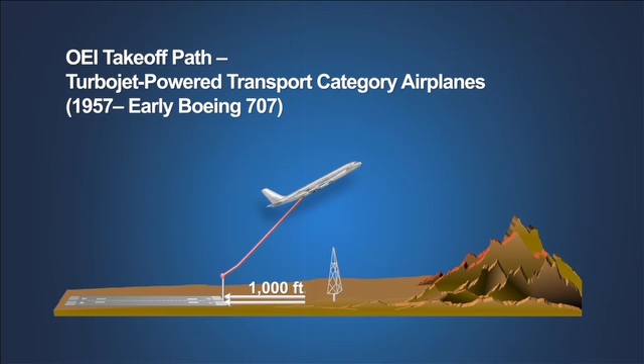In the 1950s, it was recognized that 50 feet of obstacle clearance after an engine failure was not sufficient to support the new generation of jetliners that were on the horizon. To provide adequate obstacle clearance for the new turbojet airplanes, the air carrier operating rules introduced for these new airplanes in 1957 provided an increasing margin of obstacle clearance as the airplane traveled further from the end of the runway.

To provide this obstacle clearance margin, these new rules required that the takeoff path clear any obstacle by 1% of the obstacle's distance from the end of the runway plus 35 feet until the airplane was 1,000 feet above the runway. These rules proved cumbersome for operators to use and were quickly modified. As a result, they were applied only to early Boeing 707s.

Beginning in 1958, the certification rules defined a separate takeoff flight path that begins at 35 feet above the runway surface at the end of the takeoff distance. It is a one-engine inoperative path that continues through each of the takeoff segments and ends when the airplane is at a height of 1,500 feet above the runway, or at the point at which the transition to the en route configuration is complete, whichever is higher.

This actual or gross takeoff flight path represents the one-engine inoperative performance that the airplane has been demonstrated to be capable of achieving for a given weight, thrust configuration, and set of environmental conditions.

To simplify the obstacle clearance analysis process, these revised certification rules also defined a new net takeoff flight path. The net takeoff flight path is determined by decreasing the airplane's demonstrated one-engine inoperative performance by a conservative margin. When required by the operating rules for turbine-powered airplanes, this net takeoff flight path must clear obstacles by 35 feet.

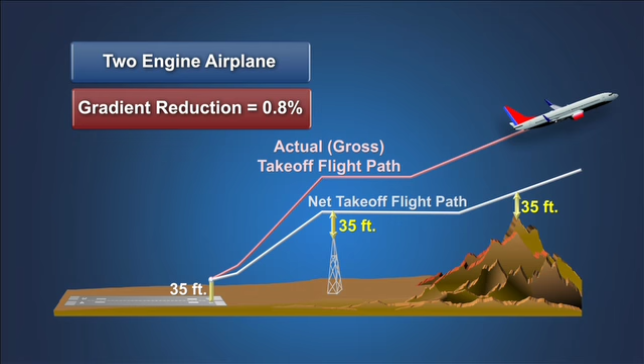Clearing an obstacle by 35 feet doesn't sound like much of a safety margin, but remember that the net takeoff flight path is defined as the actual flight path, often referred to as the gross path, minus the prescribed reduction in performance.

The intent of defining obstacle clearance in terms of net performance is to provide a reasonable safety margin should the airplane's climb performance following an engine failure be less than predicted. These differences are due to operational variations that can reasonably be expected in gross weight, thrust, airplane drag, pilot technique, wind effects, and so on.

However, except during the level flight segment, there will be an increasing margin of obstacle clearance between the actual takeoff flight path following an engine failure and the net takeoff flight path used to assess the required obstacle clearance.

For example, if a two-engine airplane is 10,000 feet beyond the start of the takeoff flight path at 35 feet during the second segment climb, the difference between the gross height and the net height will be 0.8% of 10,000 feet, or 80 feet. Thus, the requirement that the net takeoff flight path must clear the obstacle by 35 feet means that the airplane will actually clear the obstacle by as much as 115 feet.

As noted previously, variables that may reasonably occur during normal operations may reduce this margin.

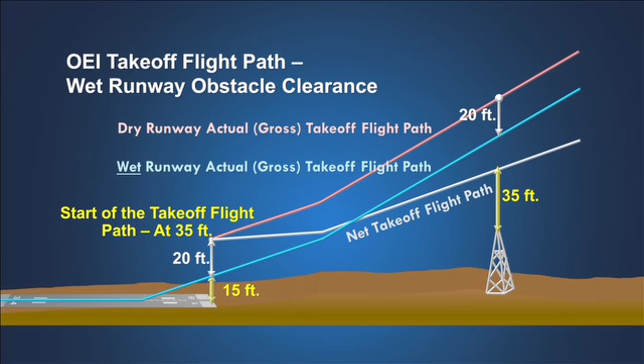Of course, if there is no engine failure during takeoff, there is no difference in the flight path of the airplane taking off from a wet runway compared to taking off from a dry runway.

The airplane manufacturer is required to furnish performance data and procedures for use in assessing net takeoff flight path obstacle clearance. The airplane manufacturer has significant latitude in the design and presentation of this data, including providing it in an electronic format. In addition, the procedures used for constructing the net takeoff flight path and the nomenclature used on the data charts may vary widely between manufacturers.

While the complex array of charts typically provided in the airplane flight manual satisfies the regulatory requirements, most pilots would find it impractical to use these charts for routine departure calculations.

The days of pilots calculating takeoff obstacle clearance from pages of paper charts in transport category airplanes are long gone, and for good reason. Today, the options furnished by the manufacturers to optimize the performance capabilities of these airplanes are very complex. The obstacle data sources that must be considered have grown in number, as well as the sheer number of obstacles that must be considered in any net takeoff flight path analysis.

It is no longer considered feasible or practical to expect pilots to determine a takeoff weight limit for obstacle clearance on their own. Rather, it is expected that the analysis is completed by a professional aircraft performance engineer or a performance engineering provider, with the necessary training and resources available to make full use of data provided in the airplane flight manual. In addition, they are expected to collect and maintain an obstacle database using the best and most current data sources available for use in performing the analysis.

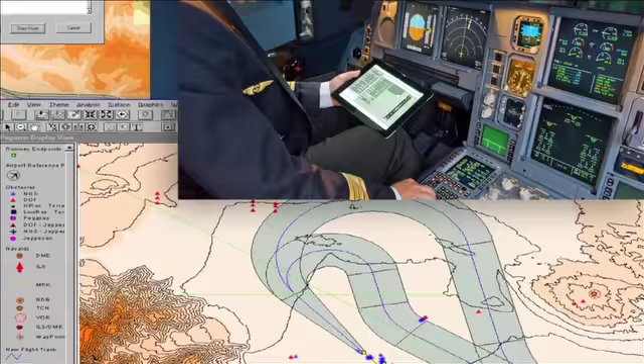In many cases, electronic performance data is now being provided by manufacturers, and in some cases the flight manual performance data is no longer provided in paper form. Performance engineers will most often use the airplane flight manual data to create a more practical means for pilots to evaluate obstacle clearance to support flight operations. Examples might include a software performance calculation tool, such as might be installed in an electronic flight bag, or a runway-specific airport analysis, summarizing the limitations for departure from a given runway. However, even these tools are dependent on a properly maintained obstacle data set.

Regardless of how the analysis is prepared and presented, there are a few important items that all pilots should know about the net takeoff flight path obstacle clearance analysis. The airport runway analysis prepared by the performance engineer provides the pilot with the maximum allowable takeoff weight in consideration of performance requirements for the takeoff airport and runways specified.

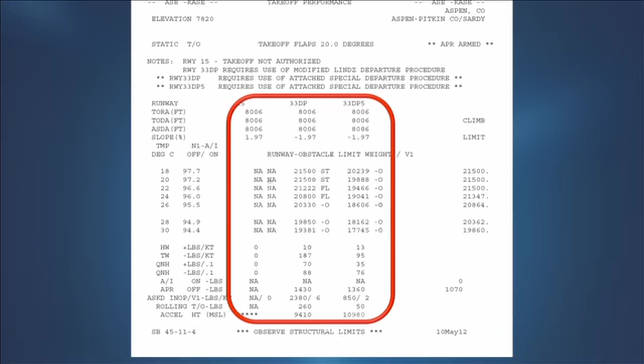Because the climb weight limit is not directly associated with departure from a specific runway, it is often shown in a separate location from the runway weight limit. In addition to the climb weight limit, a runway weight limit for each runway is provided on the analysis. The runway weight limit considers each of the performance requirements that may restrict maximum allowable weight when taking off from a specific runway. Among other things, this runway weight limit assures that the net flight path will clear all identified obstacles by the required margin along the departure path.

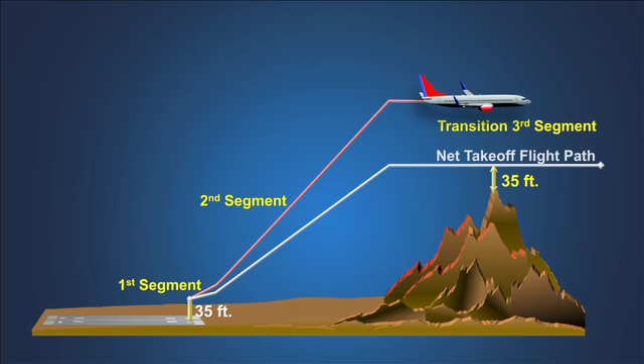When preparing the analysis, the performance engineer must consider the performance data and procedures for calculating the net takeoff flight path prescribed for each airplane type. The net flight path data for most airplanes allow a second segment climb to any height above 400 feet that is necessary to clear obstacles up to a maximum height that permits the cleanup and acceleration to VFTO speed to be completed within the time limitation on the use of takeoff thrust.

For those runways where obstacle clearance is not a limitation, the operator often establishes a standard acceleration height, for example, 1,000 feet above the runway elevation. The acceleration height is provided on the airport analysis for each runway end. Leveling at this height may be required for obstacle clearance in one of the takeoff flight path segments.

However, on some airplane types, the second segment net takeoff flight path data terminates at a gross height of 400 feet above the runway. When this is the case, the engineer must plan the transition segment obstacle clearance on the assumption that the pilot will level off and accelerate at that height. Therefore, the maximum allowable takeoff weight cannot be based on climbing higher than 400 feet above the runway.

Still, other airplanes are capable of an extended second segment climb, where the airplane is assumed to continue climbing at V2 with takeoff flaps to the end of the takeoff thrust limit. The transition segment is then completed using maximum continuous thrust. To use this option, it must be demonstrated that the airplane is capable of meeting the minimum gross climb gradient requirement for the final segment at the designated acceleration height with takeoff flaps extended and maximum continuous thrust.

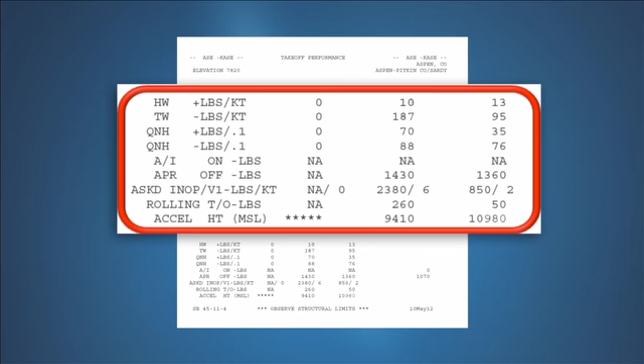Using data furnished in the AFM, the engineer determines weight limit additions or subtractions applied to the runway limit weight to account for headwind or tailwind component, non-standard atmospheric pressure, engine bleed and ice protection configuration, and so forth. In some cases, the corrections are tabulated as part of the airport analysis, and the flight crew must apply adjustments to the limit weights. To deal with the complexity of the obstacle clearance analysis, some pilots have tried to simplify it by thinking of it in terms of meeting a required climb gradient.

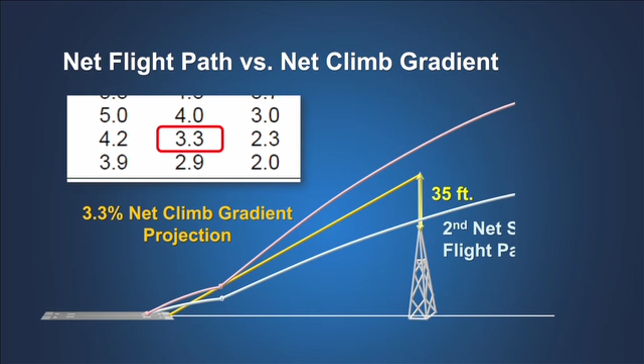For example, the standard 200-foot per nautical mile or 3.3% climb gradient used on IFR departure procedures. It is important to understand that the one engine inoperative climb gradient data furnished in the airplane flight manual represents a spot value or snapshot of the airplane's performance at a particular point in the takeoff path. Airplane climb performance diminishes as the airplane climbs due to thrust lapse rate loss and as true airspeed increases with height.

While it may appear that acceptable obstacle clearance can be demonstrated using a rise over run analysis based on a spot climb gradient, in reality, that is not the case, since the first and second segment net takeoff flight paths are not a constant gradient. As mentioned, the gradient reduces as the airplane climbs due to thrust lapse rate loss and as true airspeed increases with height. In addition, there is often a marked difference in slope between the first segment and the second segment due to drag resulting from the landing gear retraction sequence.

Typically, the only rise over run obstacle assessment found in the AFM is for the final segment. The final segment flight path does not have any large discontinuities in it since the configuration is constant throughout, unlike the initial portion of the takeoff flight path where the gear is in extended position in the first segment and in the retracted position in the second.

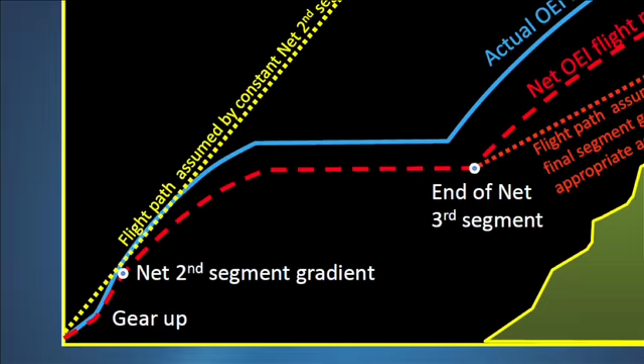The combination of these factors make it possible for determining a conservative gradient based on the distance to the obstacle for use in a rise over run obstacle analysis from the end of the transition segment through to the end of the final segment. As you can see from this graphic, a simple projection of a climb gradient does not ensure compliance with the obstacle clearance rules in the event of an engine failure. Any time that the yellow line showing the constant assumed net second segment climb gradient is above the red net takeoff flight path line, we cannot assume that the constant gradient method will provide the required obstacle clearance because it does not reflect the airplane's true net takeoff flight path.

Rob Root from Boeing is going to explain to you what this slide means.

Start with the big picture before detail. So climb and obstacle clearance are completely separate. Don't even think about them together. But here's what a pilot might be inclined to do: my twin engine airplane has to have a second segment gradient of 2.4%. That's 2.4 feet up for every 100 feet forward. So as long as the obstacle doesn't violate that line, I'm always okay, right? Well, that's what's represented by the dashed or dotted yellow line there. That's assuming the airplane maintains a constant gradient equal to what the gradient is right at the point where the gear comes up.

Let's talk about reality. Before that point, the airplane is in a considerably worse drag configuration, right? We have the gear down still. In fact, it could get worse before it gets better because we might have an airplane where the gear doors come open to allow the airplane to retract the gear. Where we're evaluating that second segment gradient, the gradient's actually worse. Okay, what about after that? Well, after that, thrust is going to lapse as we climb up in altitude. And it's also going to lapse to some degree because we're holding a constant indicated airspeed, V2, and yet our true airspeed is going up as we go up in altitude. So that's going to cause a loss of gradient too.

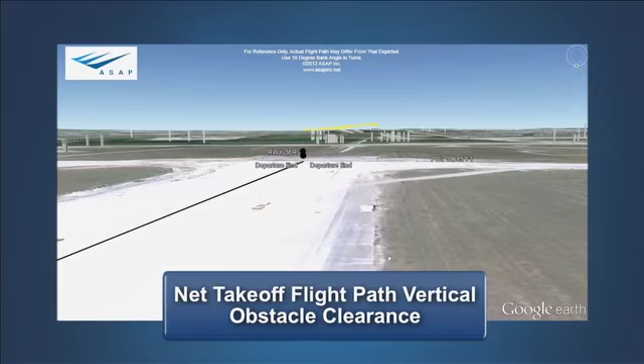Any other questions? The big thing I want you to remember is this is more than just a simple geometry problem. So don't take the 2.4% or the 3.3%, draw a straight line, and conclude that you're safe with regard to obstacles. Our discussion thus far has focused on how the net takeoff flight path clears obstacles by the required height, but we haven't discussed which obstacles must be cleared.

To help answer this question, FAA released Advisory Circular AC 120-91, Airport Obstacle Analysis. According to the operating rules in Part 121 and Part 135, any obstacles located 200 feet on either side of the flight path within the airport boundary, or 300 feet on either side after passing the airport boundary, must be cleared vertically by the net takeoff flight path.

This advisory circular, released in 2006, provides guidance on developing obstacle analysis that meets the intent of this requirement by accounting for factors that may cause a difference between the intended track of the flight path and the actual track of the flight path following an engine failure. The AC provides methods that account for factors that may affect the actual ground track relative to the intended ground track, such as wind and available course guidance.

This is accomplished by using an obstacle accountability area within which all obstacles must be cleared vertically by the net takeoff flight path. For an engine failure procedure centered on the extended runway centerline, this area begins at the runway end and expands at a predefined rate until it reaches a maximum width of 2,000 feet either side of the intended track.

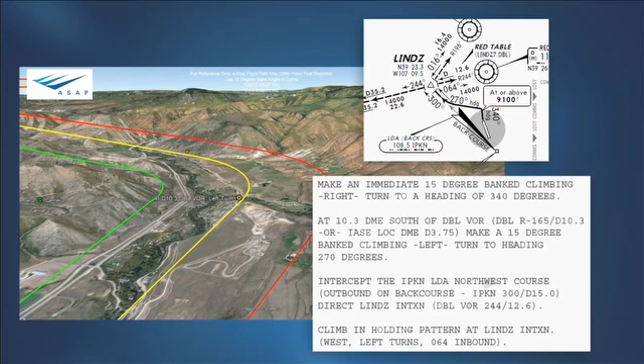Although not used in this example, there is an option to reduce the obstacle accountability area through analysis of the ground track, taking into account wind and available course guidance.

Another option provided in the AC uses visual guidance to avoid obstacles. While this may sound simple, the AC requires that specific procedures be provided to the flight crew, along with any weather or lighting requirement necessary to maintain reference with the desired ground track.

IFR procedures like the LINDZ standard instrument departure often contain minimum climb requirements. As mentioned by our flight crew in the Aspen briefing, this SID has a climb gradient requirement of 465 feet per nautical mile, up to 10,000 feet MSL.

Over the years, pilots have asked many questions concerning the climb gradients published on SIDs and obstacle departure procedures. They have heard a variety of answers, some of them quite dubious. Let's answer the most important question first.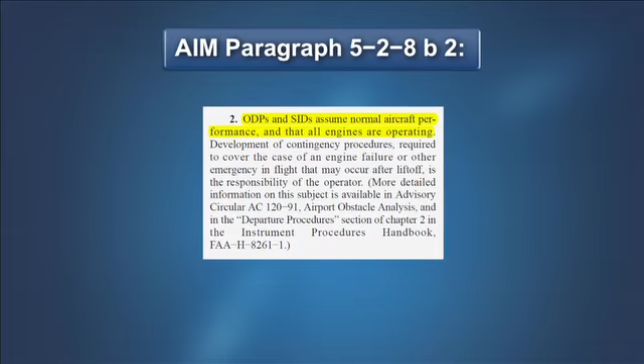All IFR departure procedures are based on normal airplane operation and assume that all engines are operating. Compliance with the climb gradient published on a SID or ODP is based on the normal all engines operating climb performance of the airplane. There is no requirement to demonstrate compliance with a SID or ODP based on one engine inoperative performance. If an engine fails on takeoff in a transport category airplane, the operating rules and procedures previously discussed are used to address that failure.

The IFR departure procedure is no longer applicable. The pilot should refer to the engine failure contingency procedure for the runway in question. This procedure was developed to address this specific failure. The climb gradient published on a SID or ODP is treated as a plane, originating at the end of the runway, that must not be penetrated from above until reaching the published altitude, as opposed to a gradient which must be exceeded at all points in the path.

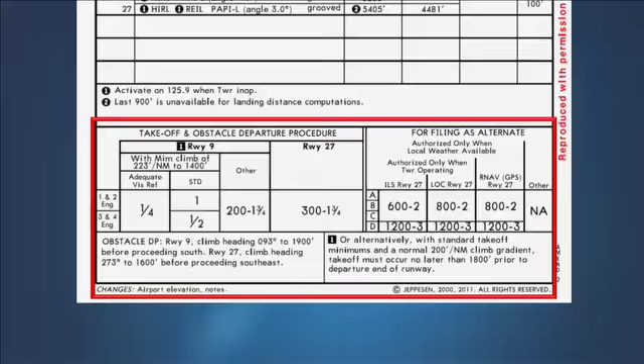The climb gradient will provide obstacle clearance based on the assumption of normal all engines operating performance. However, the climb gradient on a SID may also be established to meet an ATC requirement, such as separation from other airplanes, and therefore may be greater than what is required for obstacle clearance.

These climb requirements are determined in consideration of all aircraft that are authorized to use the procedures and the full range of airspeeds that may be flown by departing aircraft, for example 250 knots below 10,000 feet.

On the other hand, the contingency procedures for an engine failure on takeoff are developed based on the demonstrated performance for a specific airplane type. The airplane's flight track can be accurately predicted based on the actual speed flown following an engine failure, for example V2 speed. Therefore, as we have seen, the area in which the obstacles that must be assessed for net takeoff flight path clearance is smaller than the area used for normal IFR departures.

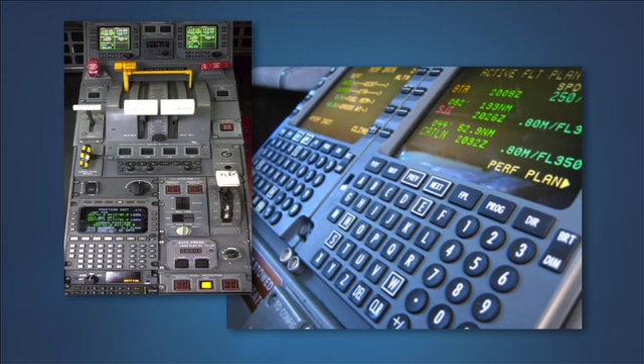The flight management systems on many business airplanes provide features for computing airplane performance, including climb weight limitations. Pilots should be aware that the results provided by these systems are only as accurate as the obstacle information entered by the pilot. If the pilot enters the climb gradient requirement published on an IFR departure procedure, the results may be misleading.

Hutchinson, Kansas runway 13 has a very simple obstacle departure procedure: climb heading 132, which is the runway heading, to 3,100 feet MSL, before proceeding east. Since no climb gradient is published for this runway, the standard 200 foot per nautical mile requirement is assumed.

The FMS for this particular aircraft is capable of computing the maximum allowable takeoff weight based on a climb gradient requirement. The climb gradient we use to determine our maximum allowable weight is the 200 feet per nautical mile standard climb gradient for runway 13 at Hutchinson.

We determine our maximum allowable takeoff weight using a typical summer temperature for Kansas, 40 degrees Celsius, which is equal to 104 degrees Fahrenheit. Maximum allowable takeoff weight computed by the FMS for runway 13 is 38,336 pounds. The takeoff field length required is 6,889 feet.

Runway 13 is 7,000 feet in length. The declared distances for runway 13 are all 7,004 feet, which is slightly longer than what is shown in the FMS.

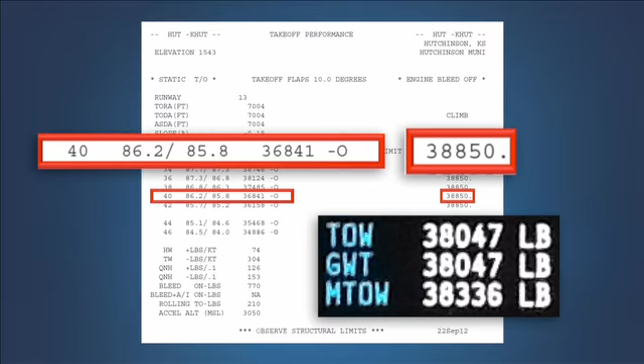38,047 pounds is slightly below the takeoff weight limit. The results returned by the FMS appear to show that we are within approved limits for takeoff on Hutchinson's runway 13. But a check of an airport analysis for this runway at 40 degrees Celsius reveals a shocking surprise: the takeoff weight is obstacle limited on this runway to 36,841 pounds, almost 1,500 pounds less than the weight shown by the FMS computation. The answer is found on the obstacle departure procedure for runway 13.

Here you will see a list of obstacle notes. These obstacles are tall enough that they would normally require a higher than standard climb gradient. To avoid publishing needlessly excessive high climb gradients to the height of 200 feet or less above the runway, the FAA publishes notes about these obstacles on IFR departure procedures. These notes are intended to advise the pilot of close-in obstacles so they are aware of them and can take the necessary actions to avoid them on takeoff.

While these obstacles may not be a significant factor with all engines operating, when required by the operating rules, the airplane's takeoff weight must ensure that these obstacles are cleared vertically by the prescribed amount should the engine fail during takeoff. Here's what the performance engineer would see when checking the obstacle clearance at the 38,047 pound takeoff weight computed by the FMS: the net takeoff flight path does not clear the obstacle by the required 35 feet, and a steeper net takeoff flight path is required.

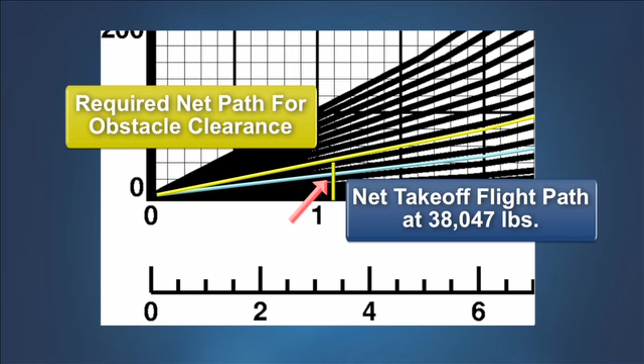Here is how it might look to the pilot. Not only does the net takeoff flight path not clear the obstacle by the required amount, the obstacle is very close, less than 35 feet from the predicted actual one-engine inoperative flight path of the airplane.

Hutchinson, Kansas is not an isolated example. A review of the obstacle notes on many IFR departure procedures reveals that the presence of low, close-in obstacles can be a significant limitation on takeoff weight. In addition, there are many other obstacles that are too low to affect the SID or IFR departure procedure standards, but must be considered in the engine out analysis.

As we noted earlier, the climb gradient published on an IFR departure procedure is based on normal all engines operating performance. This often leads to a question: how do I know whether my airplane can meet the published climb requirement? This is not a subject addressed by the certification rules. Therefore, all engines operating takeoff climb performance data is not furnished in the FAA-approved airplane flight manual.

As we have seen, there is a requirement to furnish one engine inoperative climb performance data in the AFM, but using this data to show compliance with a climb requirement published on the IFR departure procedure is not required by any operating regulation. Some manufacturers may provide supplementary all-engine climb performance data, but if that data is not available, pilots should use their knowledge of the airplane's normal performance capabilities to determine whether they can comply with this climb gradient on a particular takeoff.

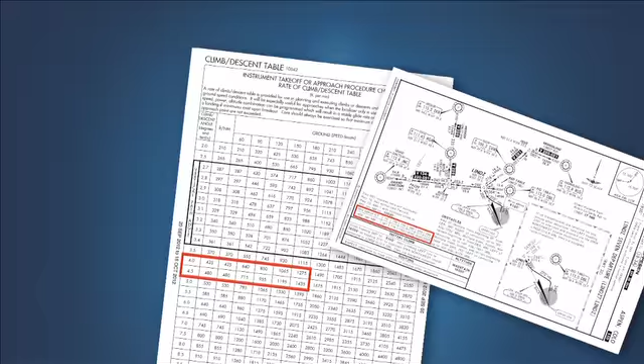To aid the pilot with this determination, the U.S. Government Terminal Procedures publication contains a chart that converts the required climb gradient into a corresponding rate of climb value that the pilot can reference during the departure. On Jeppesen's charts, this information is published on the procedure chart.

The question of what action a pilot should consider or take when the engine failure procedure differs from the IFR departure procedure is worth addressing.

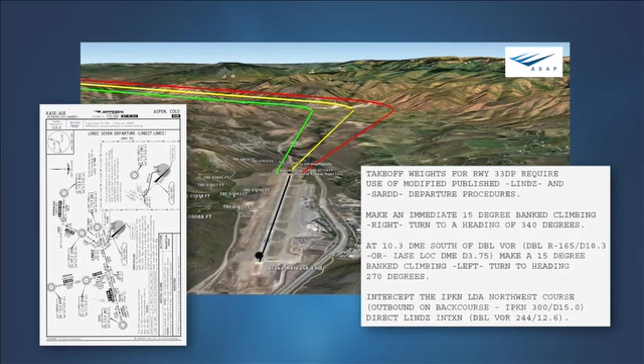At terrain-challenging airports like Aspen, the engine failure procedure typically conforms to the IFR departure procedure for the takeoff runway. However, modifications may be necessary to identify the start of any turns using precise geographical references instead of the altitude crossings that are frequently used on SIDs and ODPs.

If it is not already available, it may be appropriate for the operator to request an engine failure procedure that aligns to the SID or ODP to the extent necessary for the airplane to reach the IFR en route environment. As we saw at Aspen, this may involve the use of a conveniently located holding pattern.

But AC 120-91 prescribes a flight track of the airplane, and it's got to be clear of obstacles within this containment area, for nothing else. That is defined by the edges of the containment area, which are the green and red lines. It looks like they come together here. Actually, as you get further from the runway, the splay, as we call it, widens to about 2,000 feet when you're straight out, and if you have to do a turn, it increases to 3,000 feet in a turn. So we have two ways to clear obstacles.

One method is called an area analysis method, where you have to take into account the winds and so forth, and get an obstacle analysis of what lays in this area and clear it. That's very difficult for a normal pilot to go out and get an obstacle database to do, which is why you need professional people to help, particularly when you get in a turn and it expands to 3,000 feet.

The second part of this is called a track analysis method, which I like a lot better, because that's where you can use RNAV and stay on a defined track. You follow the magenta line and you're very, very precise on what you can do in terms of your one-engine inoperative departures.

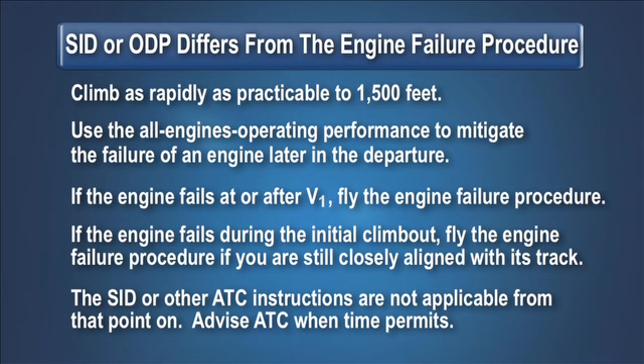If the engine fails during initial climb out, fly the engine failure procedure if you are still closely aligned with its track. If the engine fails at this point, the SID or other ATC instructions are no longer applicable. When time permits and the airplane is under control, advise ATC of your intentions. Controllers are trained that the pilot of a transport category airplane will utilize a contingency procedure in the event of an engine failure.

If the engine fails after the airplane has turned away from the engine failure procedure's track, the option of turning back to rejoin the procedure does not necessarily guarantee obstacle clearance. This is where the altitude gained in the initial all-engines-operating climb is of greatest benefit and provides additional safety. Turn away from known obstacles.

Use the terrain display of the TAWS or EGPWS to identify high terrain or obstacles along the current flight track. Use the peaks mode, if available, to identify the height of these obstacles and assess the need for a turn. The approach chart will portray prominent obstacles, however pilots are cautioned that not all obstacles are shown on these charts. Finally, seek assistance from ATC, which can vector the airplane away from high terrain or obstacles. If necessary, request vectors or a hold from the controller to reduce crew workload while addressing the emergency.

When taking off from an airport with limited ATC services or radar coverage, be familiar with the minimum safe altitudes or terminal arrival area altitudes for the approaches serving the airport, especially in areas encompassing the takeoff and initial climb out. The MSA or TAA for an RNAV approach is centered on the runway threshold. These altitudes provide at least 1,000 feet of obstruction clearance within a particular sector. Once above these altitudes, a turn back to the airport can be safely accomplished, provided you remain within the maximum distance published for the MSA or TAA.

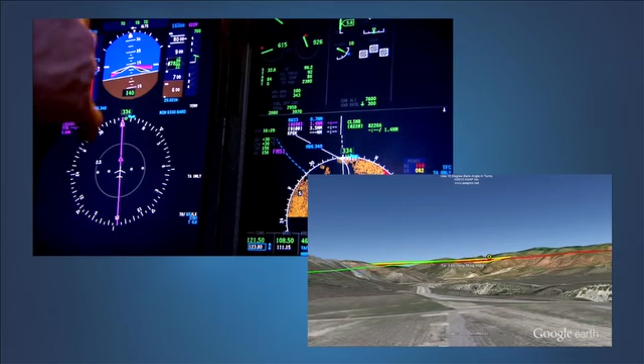Positive rate. Gear up. Had the left engine roll back. Okay, there's the end of the runway. Coming to 340, heading half bank. Speed bug, V2.

Set. Looking for 10.3 miles. Copy that.

November 300, Charlie Charlie, contact departure 123.8. Have a good day. November 300, Charlie Charlie, switching.

And when you get over there, go ahead and declare an emergency.

Departure, November 300, Charlie Charlie's with you, declaring an emergency. 5 souls on board, 3.5 hours of fuel. We've had an engine failure. We're flying the LINDZ departure procedure. We'll be holding at LINDZ on the 244 with left-hand turns.

Roger, November 300, Charlie Charlie. This is departure, we acknowledge your emergency. Report entering the hold at LINDZ. We'll report entering the hold, November 300, Charlie Charlie.

There's 10.3, I'm in the turn to 270. All right, we're looking for an acceleration height of 9,330. If you would help me watch for that. Will do.

Passing 9,330, accelerating to 170. Amps available. Would you like the engine failure checklist? Engine failure after V1, affirmative.

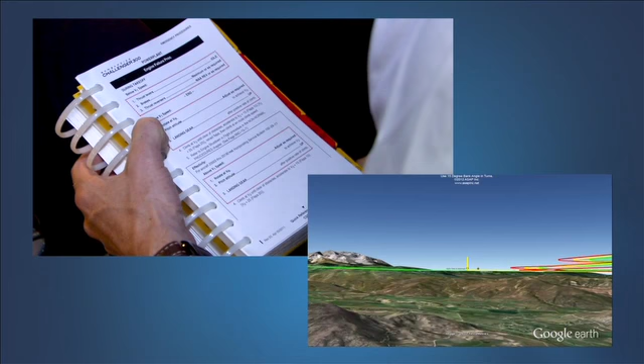Engine failure procedure above V1. Rotate at VR, pitch attitude adjust as required to achieve V2. Landing gear up after a positive rate of climb. Climb at V2 until clear of obstacles, then accelerate to V2 plus 15. Flaps retract, then climb at en route speed. That's where we are right now.

And I have the engine shutdown in-flight procedure. Go ahead. Thrust lever, confirmed? Left change, engine run switch off. Confirm? Confirmed.

Rudder trim as required. Electrical load reduce. Bleed switch off. Cross flow open. Anti-ice off. Monitor fuel balance. Cross flow as required. Transponder goes to TA only.

Land as soon as practical. Next is the engine air start procedure or the single engine landing procedure. Your choice. We'll do the engine air start. There's no reason not to.

We'll use the APU-assisted one, so we'll get the engine restarted if we can, and we'll proceed to get a clearance over to Denver as we discussed previously, and just soon not go back into Aspen. Concur.

We will probably need to climb to at least 17,000 or flight level 190. We can ask ATC, but that shouldn't be a problem. Roger.

And if you want to tell him we're crossing LINDZ, entering the hold. Approach, November 300, Charlie Charlie's entering the hold. We're going to run a checklist and then proceed to Denver.

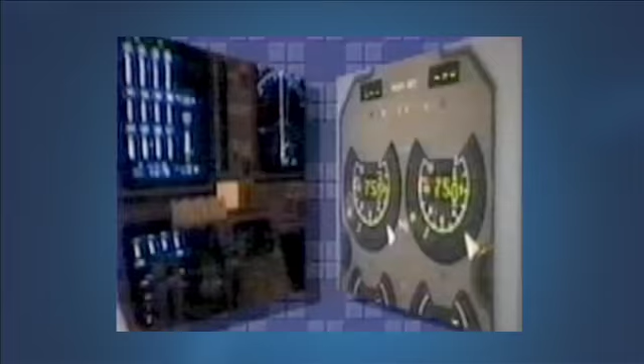An engine failure is an extremely rare event with today's modern engines. In fact, many pilots will never experience an engine failure during their career.

A study of accidents and incidents occurring between 1959 and 1996 involving engine thrust problems, including engine failure, found that over 70% of these events occur in the takeoff and climb phase of flight. If you should be one of the unfortunate few who experiences an engine failure on takeoff, will you be prepared? Will your airplane have the necessary performance to clear the trees, buildings, cell towers, and the terrain beyond the end of the runway? Performance planning is key if a pilot is to meet these challenges.

In the last couple hours, we've presented the whole concept of declared distances, wet runway takeoff performance, landing distance assessments, and departure planning, including all that one engine inoperative. Just a ton of stuff. But I'd like to ask you, if you look back in your own personal experience, when you've had performance planning training in the past, what did you do compared to this?

I hope you agree that having the visuals here and having some of the exact examples with particular airports is quite a useful exercise. I think it is. And to get rid of those spaghetti charts is a great exercise as far as I'm concerned.

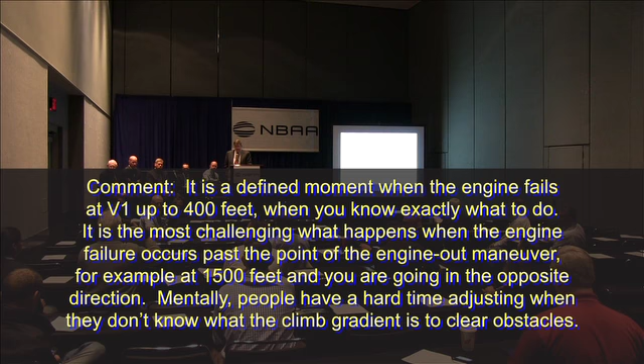There's a defined moment where you have an engine failure. It's an easy, no-brainer situation in most cases, if it happens from V1 all the way up to 400 feet. But the most challenging part for crews and pilots alike is what happens when that engine failure occurs when you pass the point of the engine-out maneuver. Let's say, for example, it happens at 1,500 feet. It goes completely in the opposite direction, and you have that engine failure.

You're using visual maneuver to maintain obstacle clearance, you're using ATC, or you continue along the standard instrument departure procedure. Mentally, people have a hard time adjusting to the fact that they don't know what the climb gradient performance is going to be if they continue along the SID to assure that they're going to maintain and clear that obstacle that they've been given on the SID. They just have a hard problem.

I know that what TERPs says is that, technically, you cannot penetrate the plane from above during the departure procedure. So the big question is, how am I assured once I'm past that point that I'm going to meet that climb gradient so that I don't penetrate that plane from above during an engine-out after I've already passed that point and I continue along the SID? Yeah, you're in no man's land. It's what you're feeling, right? Right. Anybody want to?

Yeah, because that's a great question. Does everybody understand the question? You're in no man's land after 1,500 feet. Well, actually, that's part of the engine-out analysis. In the olden days, we might have just made an assumption you're going to do a straight-out departure after an engine failure, and we didn't look beyond what we call the OEI chart, beyond a couple miles or so. But all that's changed as we've gotten into more difficult airports, and we realized that's just not good enough in mountainous terrain. Then we realized after we analyzed those difficult airports in mountainous terrain, hey, there were some flatland airports too. New York might not have mountains, but it has buildings too.